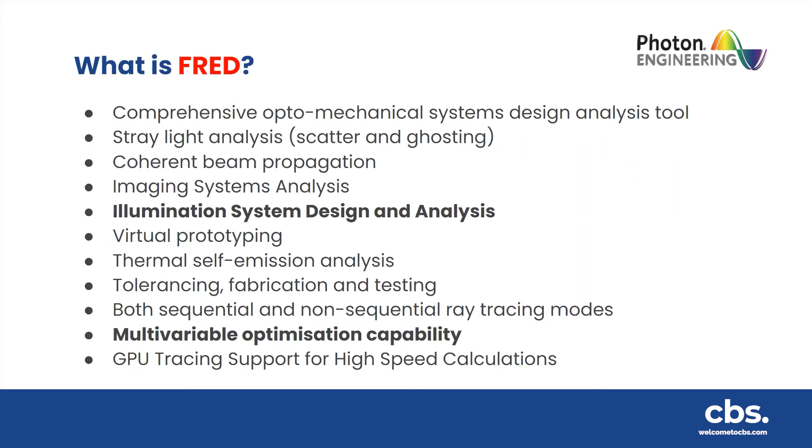We can also deal with lots of other topics in here. So we can deal with thermal self-emission, tolerancing. FRED can ray trace in lots of different modes. And FRED also has a multivariable optimization capability, which is also, of course, one of the main topics of today. And another special trick that FRED has is it can ray trace using GPUs, which is incredibly fast. So today's topic is optimization.

So first of all, what is that? We're going to talk about optimization very generally first, and then we'll take a look at a sample file where we'll see FRED optimize. So optimization algorithms in optics perform a very special process. They allow us to take an optical system and apply changes to that optical system with the intention of making that system better than our starting point. And to optimize, we need a couple of things.

We first of all need variables, and that is a table of things that the software is free to automatically change. So they include things like curvatures, locations of optics, tilts, anything like that. We also require targets. These are a table of calculations of things that we wish to measure to actually decide whether or not our system is getting better or getting worse. And they include things like spot sizes, the power that we measure on a given plane, various things like this.

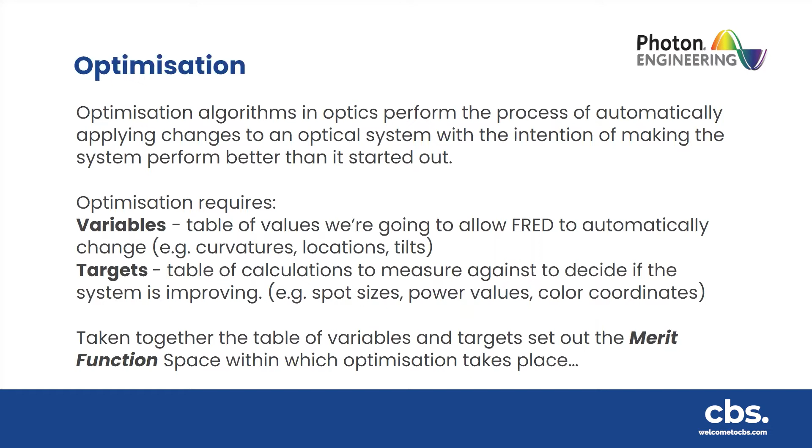So taken together, that table of variables and also targets set out the merit function space within which optimization takes place. So the merit function is a key component of how we optimize. The merit function essentially looks something like this. This variable vector x here will contain all of the items which we can vary. So that could be a curvature, a z location of an optic, things like this. And we have m variables. So these all describe things that we are free to change.

And when we've chosen values for these, which is something that the actual optimization function does, that defines some position x in variable space. And in the merit function, essentially what we do is at each position we're at, we calculate the value of the thing we're interested in. That could be the value of the spot size, the value of the power, whatever. And once we know that value, we subtract from it the target that we want, and that difference is squared so that the value is always positive. And this value minus target essentially describes how far we are from where we wish to be.

This value is multiplied by a weighting factor, and this is combined in a way that we call the actual aberration itself. The merit function is then simply the sum of all of these differences, how far away we are from where we wish to be. So the merit function is the sole thing that represents what is better in our optical system. The lower the value of the merit function, the better our system is. And an ideal merit function is 0. And that only happens when every single value matches every single target that we want.

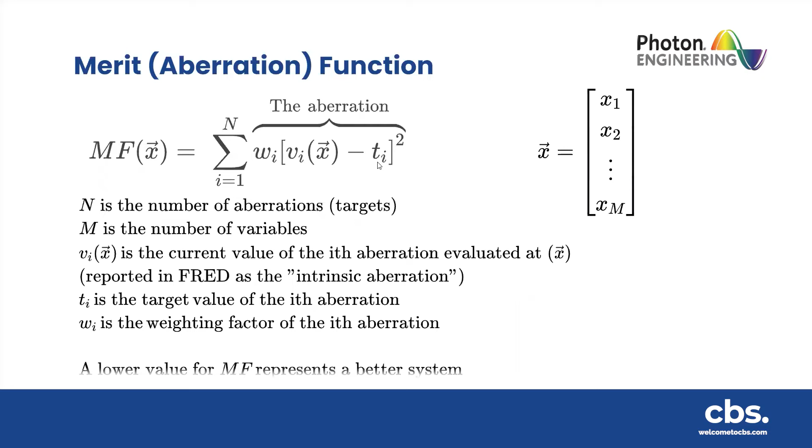So if we think about a very simple system before we look at something more complex, if we take a very simple sample file like a simple lens, this lens is completely fixed. The only variable that we have is the back focal length, so how far down in Z we actually choose to measure something. And the item that we're going to measure here is one thing, which is the spot size. So we only have one variable and one aberration. And in this case, our ideal spot size is 0, so our target is 0.

So the merit function collapses to be something very, very simple, which is literally just the spot size as a function of Z. And if we plot what that spot size looks like as we move down Z, we get this nice parabolic graph. It's parabolic because it's value minus target squared. And this gives us some ideal point to place our plane for the minimum spot size. So that's a very simple one-dimensional case.

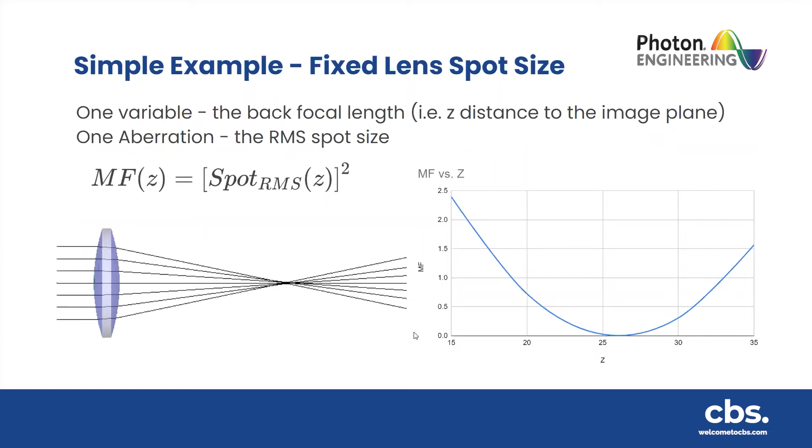At some points in my life, I've been asked, well, why do we need optimization at all? Can't we just iterate through every single possible answer and pick the one that's best? And that as a methodology doesn't really work. If we take a slightly more complex system, perhaps something like a simple landscape lens, a landscape lens is just a single piece of glass and a stop and an image plane.

If we assume, therefore, we have 6 items that we can vary, so we can change the front and back radius of curvature, the distance of the lens from our stop, the thickness of the lens itself, the distance from the lens to the image plane, and we can also choose the index of the glass. That gives us a variable vector x with 6 things that are changing.

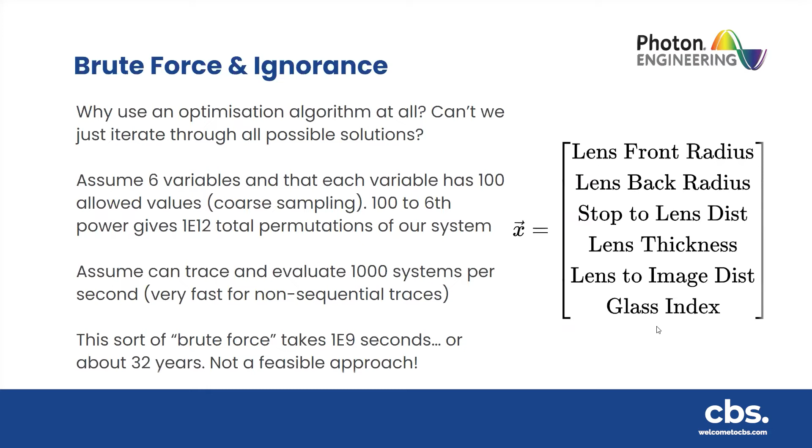Now, if we assume that each one of these items can take on 100 different values, then 100 to the 6th power gives us 10 to the 12 permutations of that system, which is a huge number. Even if you assume that you can trace and measure 1,000 systems per second, which in a non-sequential trace with lots of rays bouncing around is pretty fast, you find that that sort of brute force approach would take 10 to the 9, so 1 billion seconds, or around 32 years. And clearly that's not a feasible way of doing things. So instead, we use optimization methods, and they're needed for virtually all non-trivial problems.

Merit function algorithms are often split into 2 different camps. There's the local methods and the global methods, and they are intended to find local or global optimums. The local optimum is the best answer we can find within a given region of space, moving continuously downhill. The global optimum is the best answer possible with the lowest merit function.

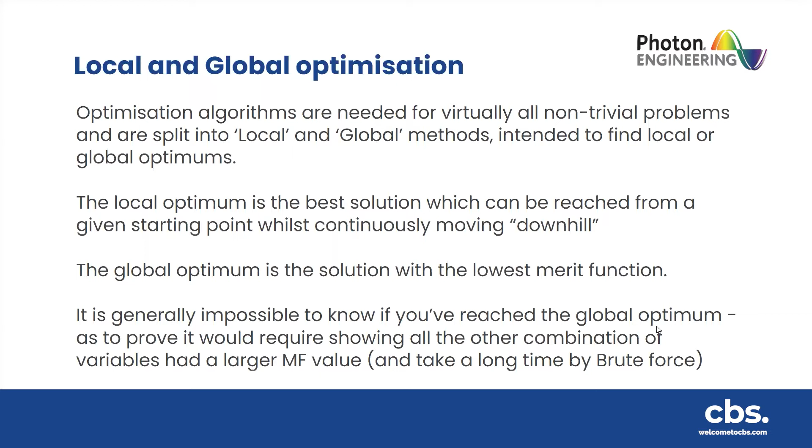Now, the issue, of course, is that even if we found the global optimum, we would never be able to prove it. Because to do so, we would have to demonstrate that every other answer is worse. And the only way we can do that is to iterate through them all, and we've already seen that takes an inordinate amount of time. So merit functions and optimizations will always give you, or will hope to give you, a better answer, but there might be better answers out there still.

So merit function space is pretty complex. If I try to draw it in a very simplistic way, this vector along the x here represents some points in our m-dimensional variable space. As we go along, we'll find these minima where things get better and then they get worse again, and the merit function gets better and then worse. Each bottoming out zone, each little valley here represents a local optimum. And the best value of all of these is the global optimum. So these are the things we're trying to find, and hopefully we're trying to find better answers.

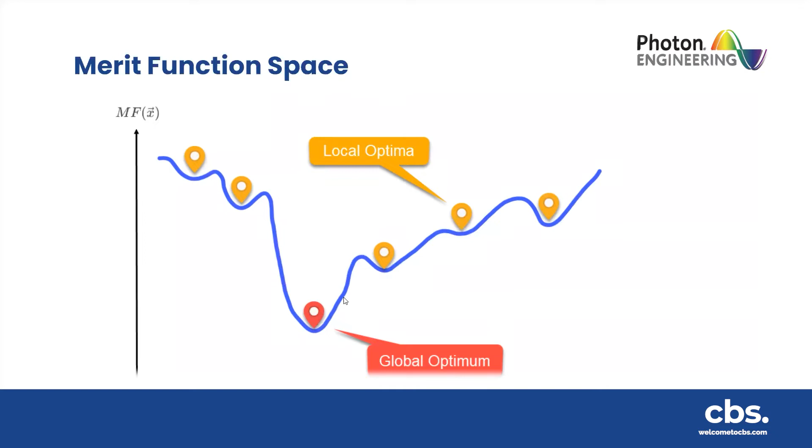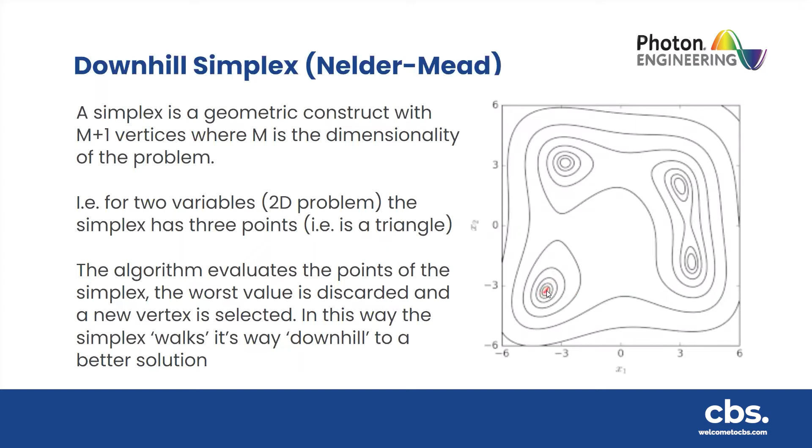So the way that this method works is that all the points on the simplex are actually calculated. So there are 3 points in this case. The worst value is discarded, and then the algorithm chooses a new point and the process restarts. And in this way, the simplex walks its way downhill to a better solution. The simplex method has some plus points and some negative points.

The positive points for this method is that it is very robust. It doesn't use gradients at all. We only need to be able to evaluate what the merit function is for each point on our simplex. And that means that it works in the presence of very noisy or highly non-linear merit functions with step changes and things like this, which gradient methods can't handle. So the method is robust and works exceptionally well.

The downsides to this method, though, is that the user has to specify a few more data points. So we have to specify upper and lower limits for every single variable that we have. That limits how big our simplex can actually be. We also need to provide a fractional step for each of those. That is essentially how far the software can move in terms of picking its starting simplex.

And we also need to define a termination threshold, which is essentially a limit at which the algorithm stops, otherwise it will run forever. The other downside to the simplex method is it's not the most efficient method available in terms of optimization algorithms, and that's the price we pay for the fact that the algorithm is so robust. So this method might incur a few extra iterations, but generally speaking, it works exceptionally well.

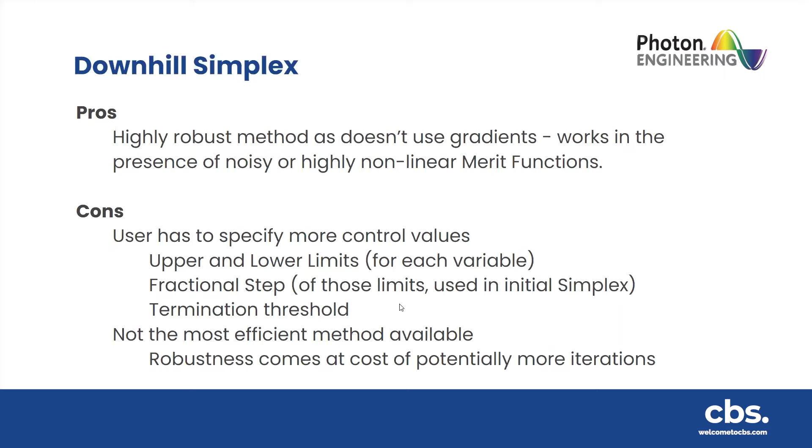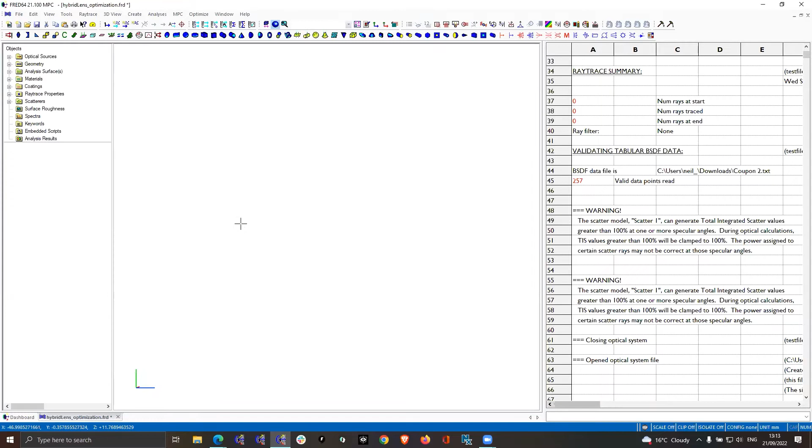So that's hopefully enough background on the optimization idea and what we're trying to do and the background to the method. We're now going to take a little look at a demo and see this happening within FRED. Here I have a fairly simple system. I have a plane over here which I'm using to collect light and measure total power. And the system that we wish to optimize is this hybrid lens. Okay, so this is a total internal reflection hybrid lens.

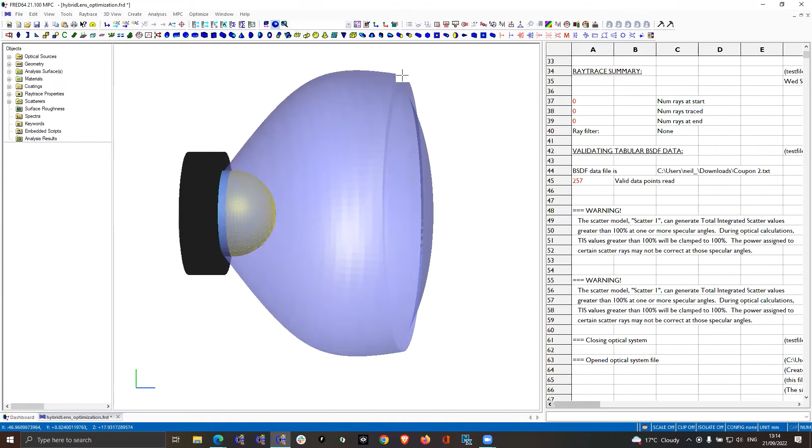So we have an LED source that's emitting light in all angles. Some of the light will transmit and actually refract through these optical surfaces. Other parts of the light will hit this optical surface at a high angle and totally internally reflect. And we want to optimize this shape to maximize the amount of light I get on my plane further downstream.

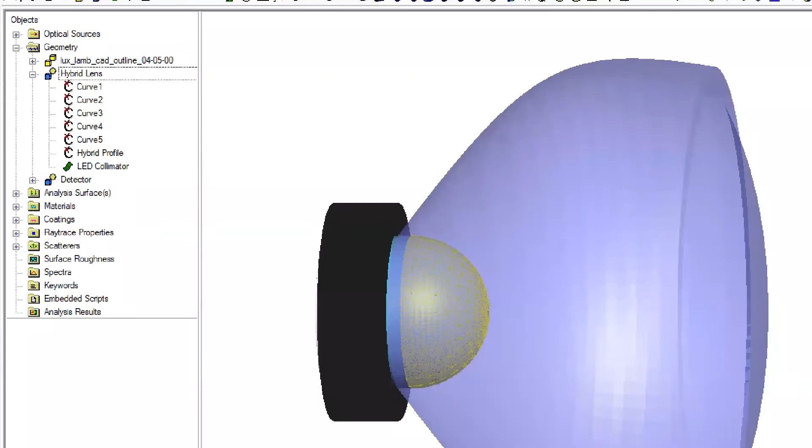So if I just run a ray trace first of all, and then calculate how much light is on my plane downstream, I have about 0.5 watts total integrated power. Okay, and that's the value that I have here. So to take a look at the file, what are we going to optimize? Well, this geometry is quite interesting in of itself. If I just take a look up here, you can see there's a couple of different curves. So these 5 segments of a curve are joined together to create a larger hybrid profile curve. And that curve is used as a surface of revolution to create this shape.

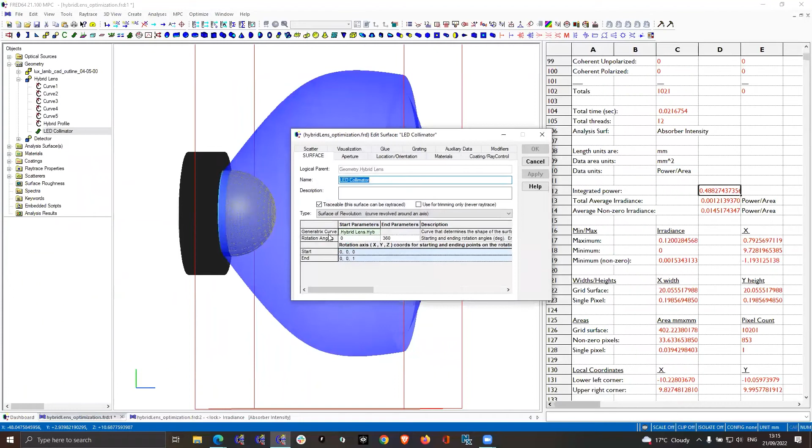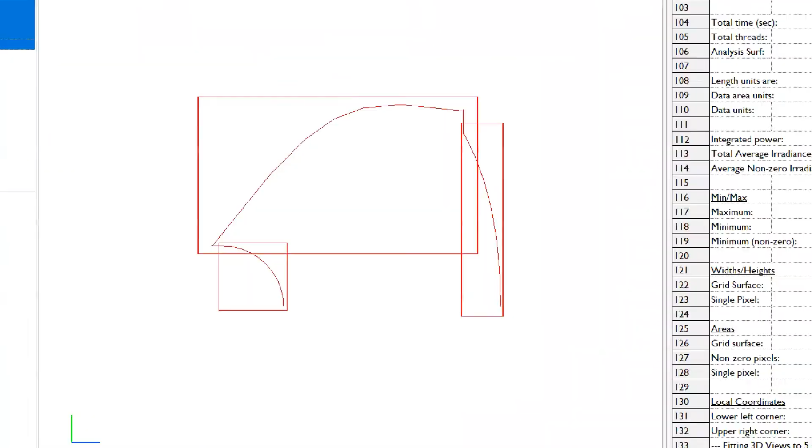So the actual shape itself is a surface of revolution using this curve, and this curve is defined from multiple other curves. Okay, so these 5 curves build this larger object. If I just take a look at these curves first of all here, I can just set them all to be traceable and focusing on these curves. The first curve is this one down here. So this curve is the first segment that follows the profile of the light emitting diode.

There's then a small flat, which is curve 2. Curve 3 is this larger sweeping curve that defines the edge. We're going to optimize the shape of this curve. Curve 4 is a flat piece that joins to the next curved surface. And so curve 5 is the final curved element here. And curve 5 we're going to optimize also. Now, these curves actually have multiple points. So there's a point in the midpoint somewhere around here. There's a point at the end somewhere around here.

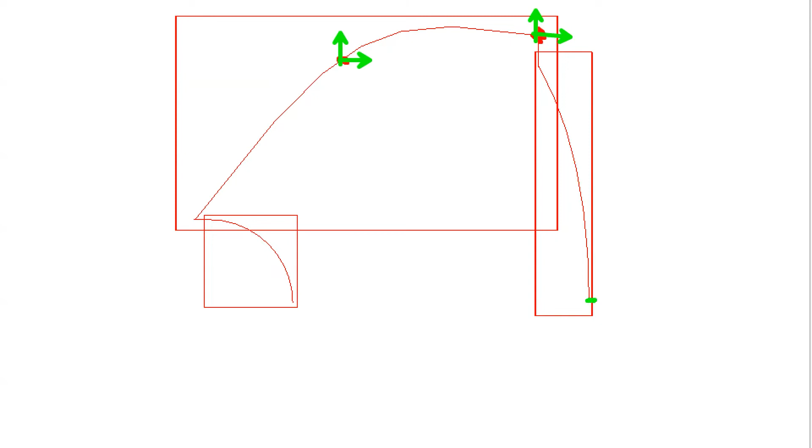And what we actually want to do is vary where these points go in space. So these points are going to be free to move in Y and also in Z. There's a point to optimize down here. This one is free to move only in Z. This point here is free only to move in Y, and it's locked to this point in Z. And then there's another midpoint over here, which is also free to move in Y and also Z. Okay, so these are the points that we're going to vary.

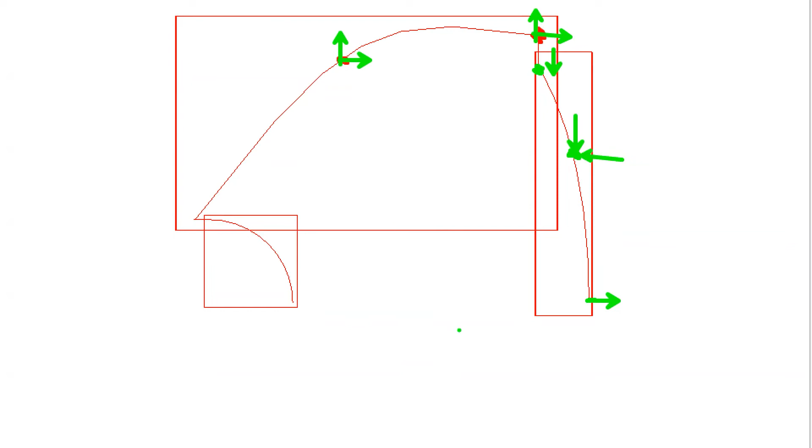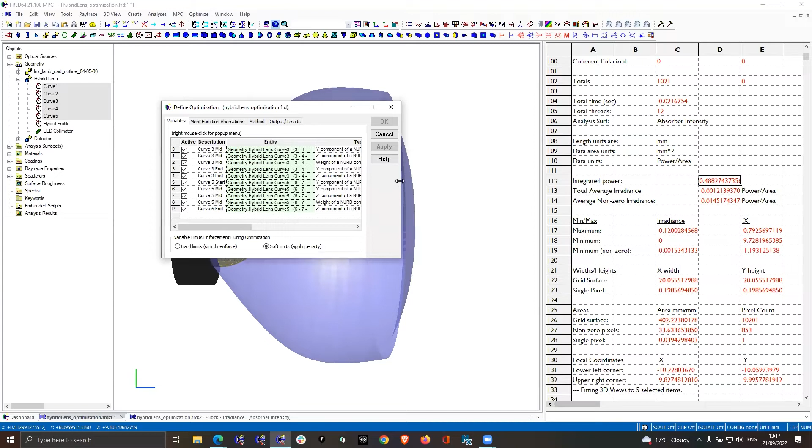So these are all defined as variables. And let me just take these surfaces and make them not traceable again. So these points are all defined as variables in the optimize section of FRED. So in the optimize area, we can go to define edit. And in this area, this is where we see the variables that we have, the merit functions that we have, and the method that we want to use.

Okay, so first of all, to talk about this table, the variables table. So this defines the points of the curve. So along curve 3, there's a midpoint here. This midpoint is free to move in Y and Z. There's some limits on where it can move to. And essentially all of these points are limited within a 12.7 millimeter box, is essentially how it's set up.

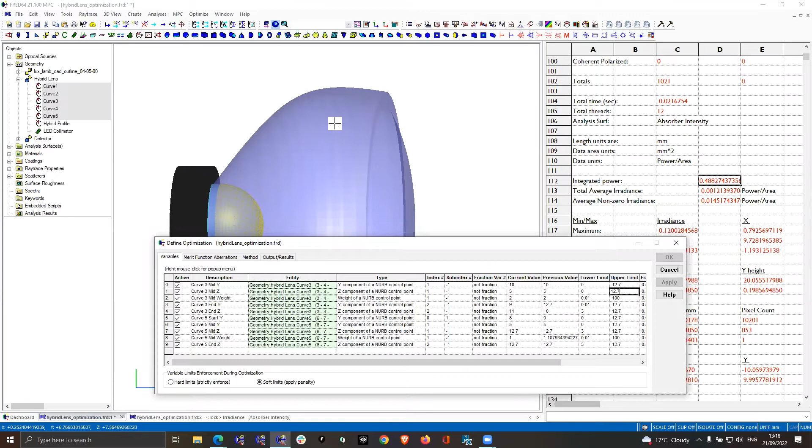There's also a weight option for each control point, which will choose how closely the line follows each point. So that is also made a variable at the midpoint. The end of the line is also variable in Y and Z, which are these two here with the two

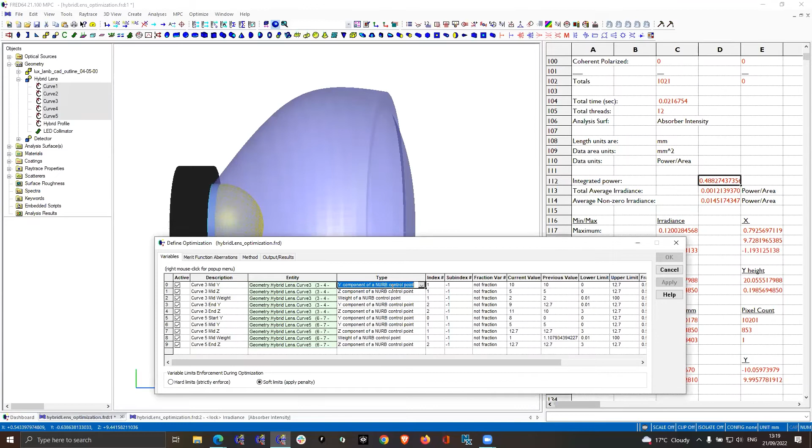endpoints. And we should say that FRED has lots of different things that we can optimize on. We can actually make them vary. So there's a whole table of things here. We're just concentrating on the NURB items because this is the shape that we're going to optimize in our case.

The other items that we vary in here are curve 5. Curve 5 is this front part of the lens. So we're varying the Y height at this point. The Z point is actually locked to the Z point of the end of curve 3. Okay, and we do that via a pickup solve. So I'll just show you that's also in the optimize area.

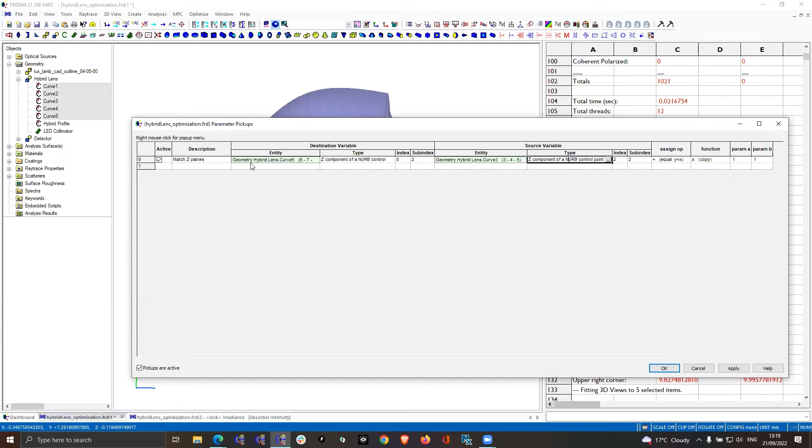So in the pickup solves area, I'm choosing the Z component of the end of line 3 and choosing that the Z component of the start of line 5 is the same. Okay, so they're matched up in the Z planes. And we then have some more points that we optimize in here as well. So we're optimizing the Y and Z points of a couple of items down here. Okay, so it's constrained to a box, but the points are free to move around within it.

There's then the merit function aberrations. These are the target values that we wish to actually have. So the merit function here is again fairly straightforward. We have a target for total power, so total maximized power on our analysis surface. So that maximizes the power that we have there. And there are also a couple of user scripted aberrations as well.

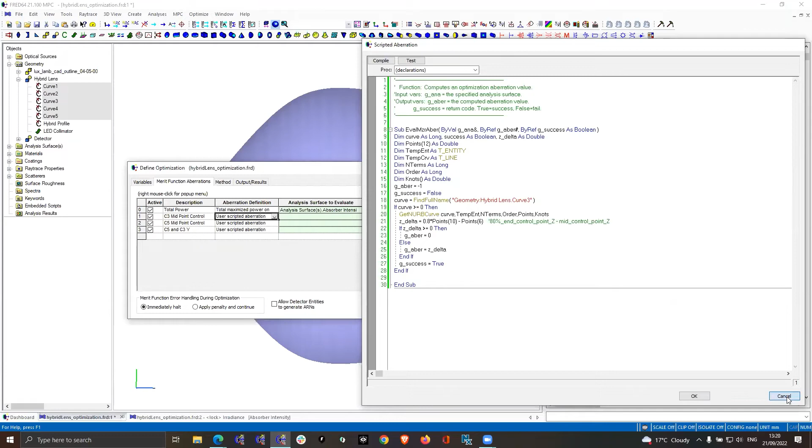And what these scripts are doing, the scripts are very short, they're not very complicated at all, but essentially what they're doing is taking a look at the midpoint on curve 3 and making sure that it doesn't go past the end point of curve 3. So we're making sure that these curves stay sensible and they don't go past each other in ways that we would rather not see. Okay, so just some fairly simple limits being applied within those.

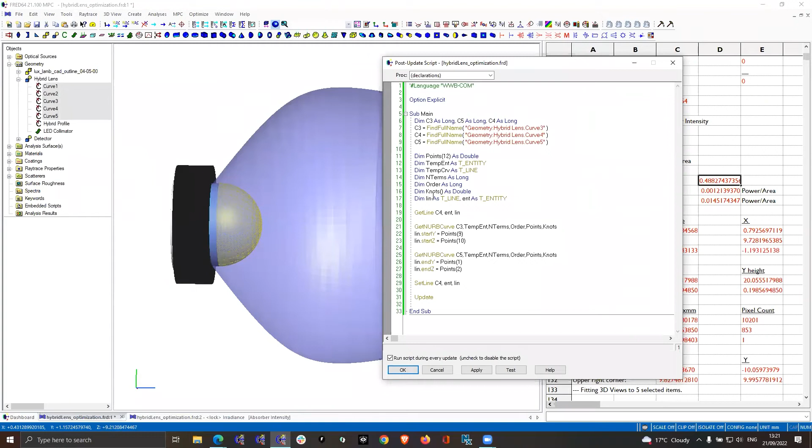And then at the very end is also a post-update script. So the post-update script, when FRED has varied some of these points, we want to make sure that the end of surface 3 still matches up with the start of surface 5. And so there's a very simple script here which updates curve 4, that linking curve. So again, a very short script, just to essentially make our surface into one continuous object.

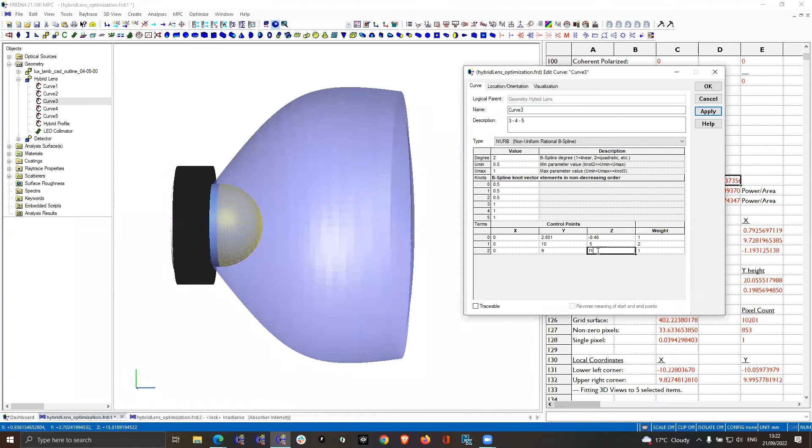So if I choose curve 3 here, and let's just change the Z coordinate from 11 to 12. If I apply that change, you'll see that the model updates, but all of the surfaces are still stitched together and there's no breakages in the surface. Okay, so we're achieving that with pickup solves and also the post-update script. So that's everything in place that we need to optimize.

The last section that we need to think about really is the optimization method, and we're going to use the downhill simplex method. Now, FRED does have some other options, and we don't have time to talk about all of them in a 30-minute webinar, okay? But this is where FRED has some global optimization options, such as simplex with multiple restarts and also simulated annealing. Okay, but we're just going to use this local simplex method here.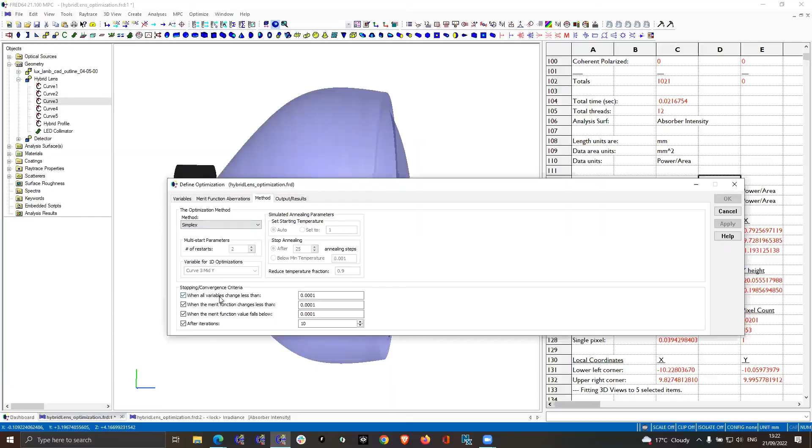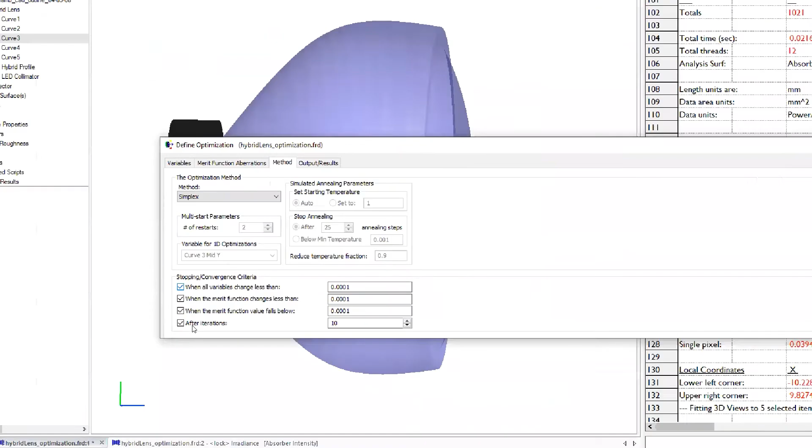And in this tab is also where we choose what the convergence criteria is. So when the variables change becomes very small, when the merit function change becomes very small, or after some number of attempts, we can choose to stop optimizing. And the first one of these conditions that is tripped will stop optimizing, okay? So that's everything. Everything is set up to optimize.

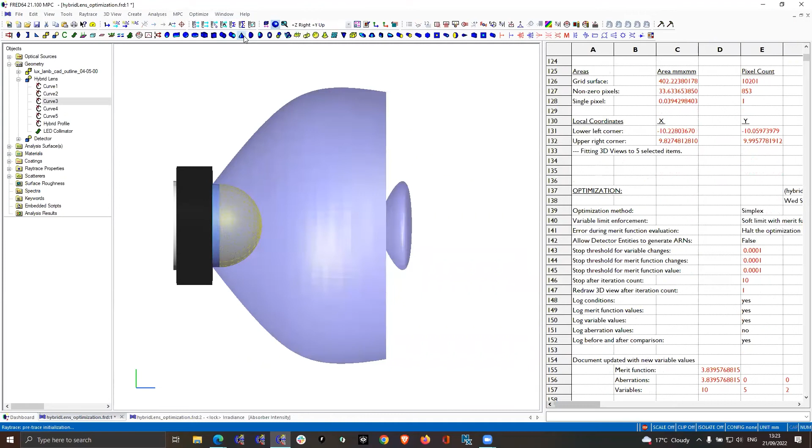So to call the optimization itself, what we do is we just choose the optimize option from the optimize tab. And here we'll see now that the surfaces will start to change shape as FRED is moving those control points around in space and updating our curve. And each point is going to try to make sure that the total power becomes larger than it was previously, and that the surfaces maintain some realistic shapes.

Okay, so as you can see, quite a lot of changes going on there. Now, while this optimizes, I'm just going to switch back to the presentation here and just talk about some general comments on optimizers. There is no such thing as a perfect optimizer. The algorithms perform in different ways. Performance is measured in terms of both the answer that they find and the number of iterations that they took to get there. And different algorithms perform differently from each other given the same problem and the same starting point.

And we don't know in advance which algorithm is going to be best. If we did, of course, we'd always choose that algorithm. Or if we knew exactly what merit function space looked like, we wouldn't need an algorithm. We'd be able to just pick the best point. Now, one thing that is key about local methods in particular is that the answers found from the optimization are generally a pretty strong function of where we start.

So that initial simplex, when that simplex is made, you can run the optimization as many times as you like. That simplex will always walk in the same way to the same local minima. If you choose a different starting simplex, it will walk in a different way and find a different one. So what this tells us is that choosing a good start point is actually something of a skill within itself.

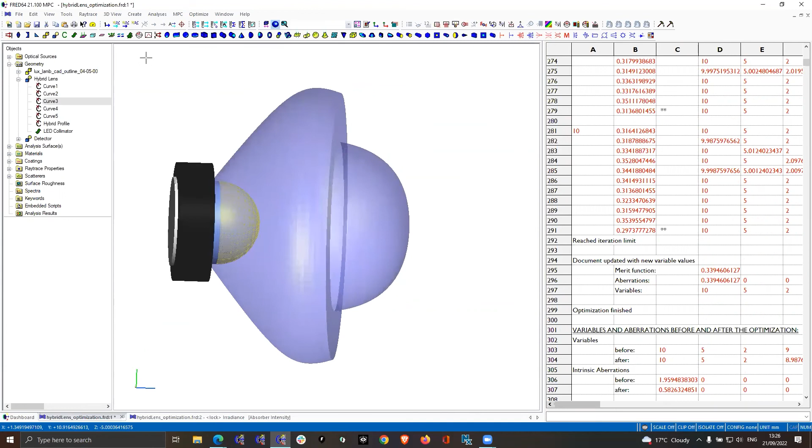Let's just go back to FRED here and see where things are. It's still optimizing. I think we set this to finish after 10 iterations. So this is the end. And this is the end point of our design. So this is still sensible because we bounded where the points on the curves could go. And if I do a ray trace here, let's just trace all sources again.

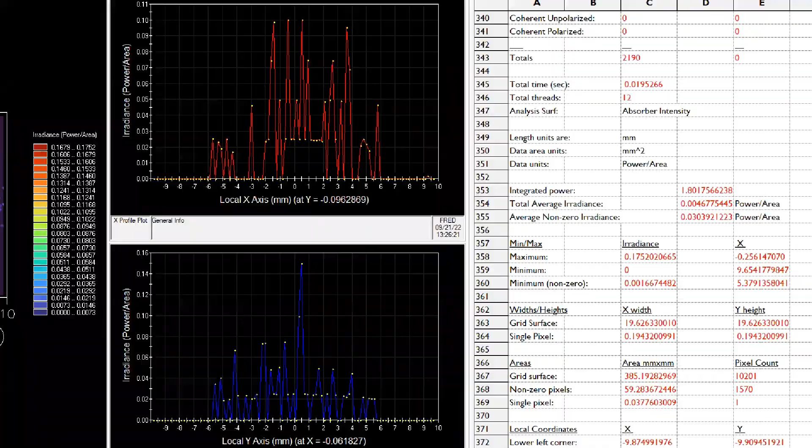So we started out with 0.5 watts of power on our plane of interest. And if I take a look now at the plane of interest, we can see we have this value up here, right? So we have 1.8 watts of power, so nearly 4 times better in terms of total power. So the optimizers helped us out a lot there. So that hopefully is just a nice intro to how we can optimize in FRED, the power that the software has and how we set problems up.